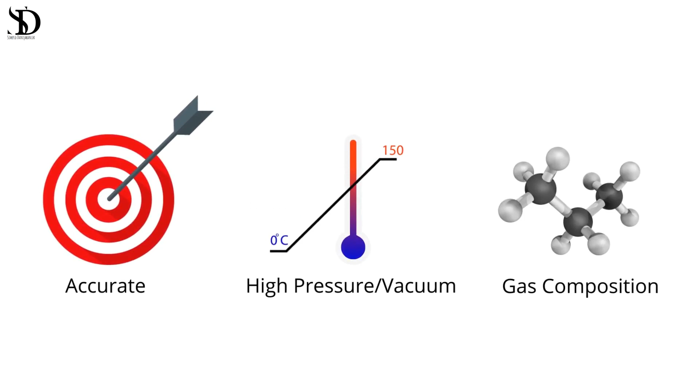Understanding electronic pressure measurement. Principle of operation. Electronic pressure measurement typically relies on the principle of converting pressure into an electrical signal. Various sensor technologies are employed for this purpose, including strain gauge, piezoelectric, capacitive, and resonant sensors. These sensors detect the pressure-induced mechanical deformations and translate them into electrical signals.

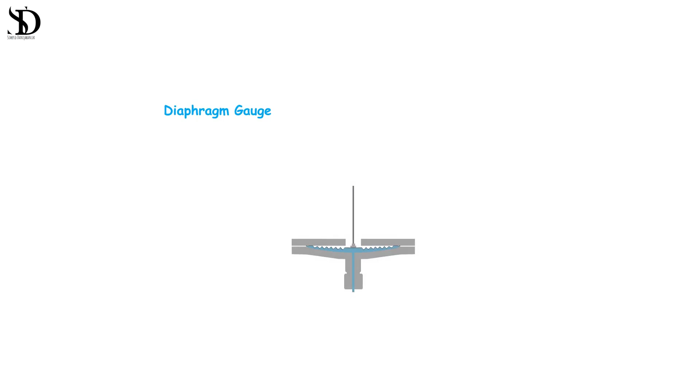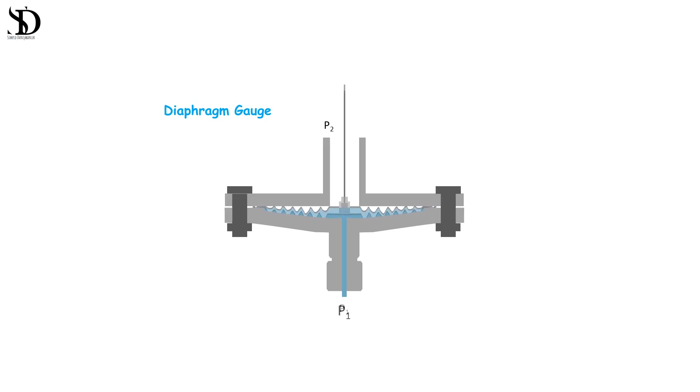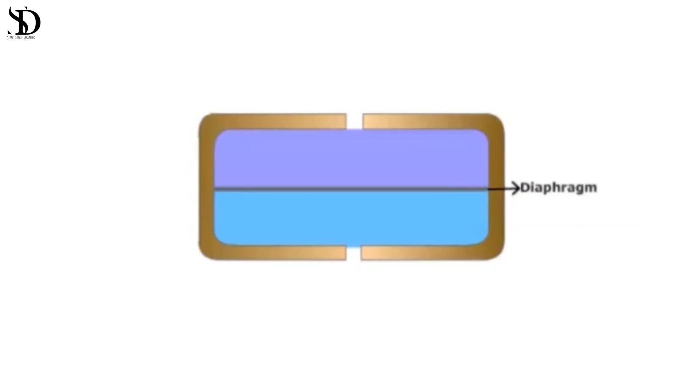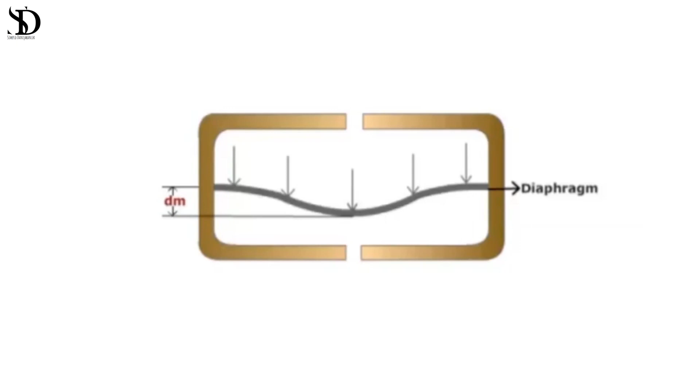Before examining the types of pressure sensors, it is useful to mention diaphragm pressure gauges and the corrugated diaphragms used in them. Diaphragm pressure gauges. Diaphragm pressure gauges are instruments used for measuring pressure in various industrial applications. These gauges rely on the deformation of a flexible diaphragm to measure the pressure exerted on it. The diaphragm, typically made of materials like stainless steel or elastomers, responds to pressure changes by flexing or moving. This movement is then translated into a mechanical reading displayed on the gauge.

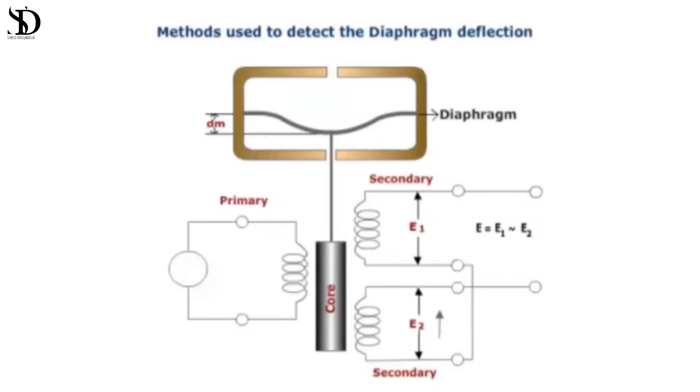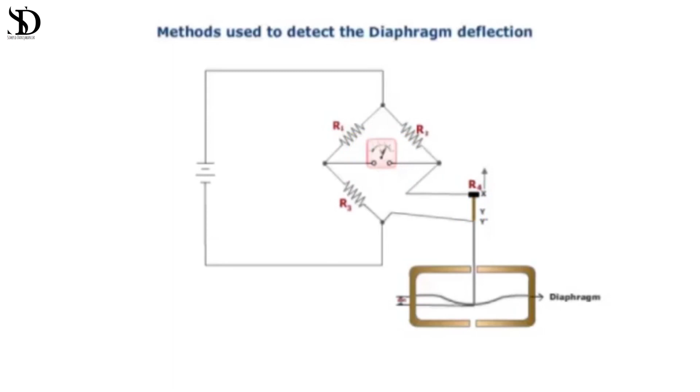Working principle. The fundamental principle behind diaphragm pressure gauges involves the application of pressure to one side of the diaphragm. As pressure increases or decreases, the diaphragm flexes, causing a change in its shape. This deformation is then linked to a mechanical system within the gauge, often a set of levers or springs, which translates the diaphragm's movement into a pressure reading. It is this deformation or deviation that electronic sensors use to read the pressure.

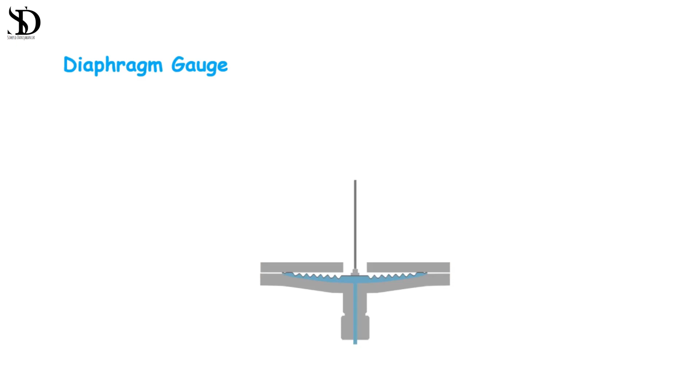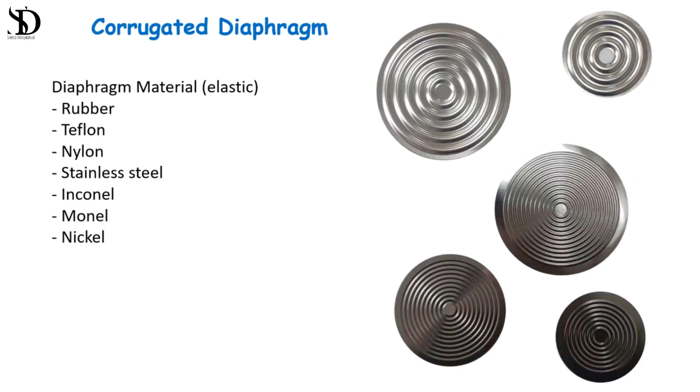Corrugated diaphragms. Corrugated diaphragms refer to flexible membranes used in diverse engineering applications. These diaphragms are characterized by their corrugated or pleated structure, allowing for greater flexibility and sensitivity to pressure changes. Features. Flexibility. The corrugated design enables more extensive deformation, making them ideal for applications requiring sensitive pressure measurements. Resistance. Corrugated diaphragms are often constructed from materials like rubber, metal alloys, or composite materials, offering resistance to corrosion, temperature variations, and chemical exposure. Uniform stress distribution. The corrugated pattern helps distribute stress more evenly across the diaphragm, enhancing its durability.

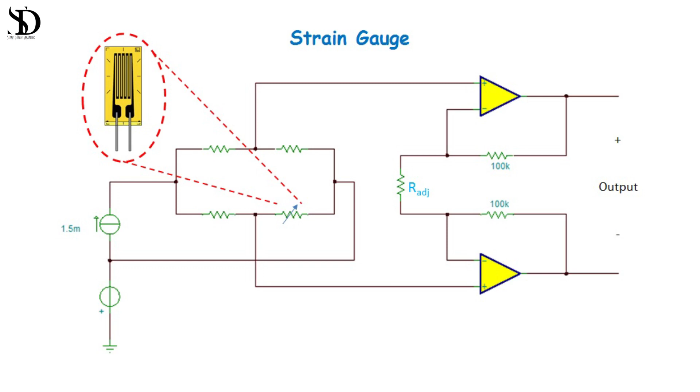Types of electronic pressure sensors. Strain gauge sensors. These sensors use the resistance changes in a wire or foil subjected to strain due to pressure, converting it into an electrical signal. They're widely used in load cells and pressure transducers, offering excellent sensitivity and accuracy. These sensors excel in applications requiring precise pressure measurements, such as aerospace, automotive, and material testing.

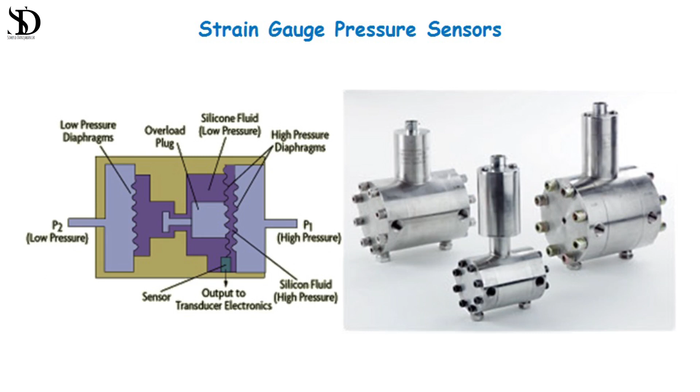Piezoelectric sensors. They generate electrical charges when subjected to mechanical stress, allowing the measurement of pressure. Their rapid response time and ability to measure dynamic pressure changes make them suitable for impact measurements, vibration analysis, and shockwave monitoring in industries like defense, automotive crash testing, and biomedical research.

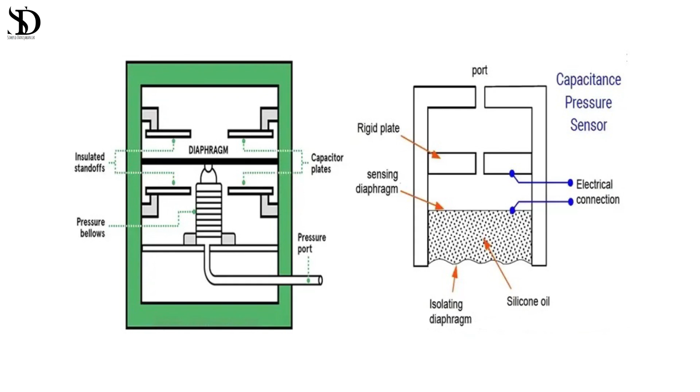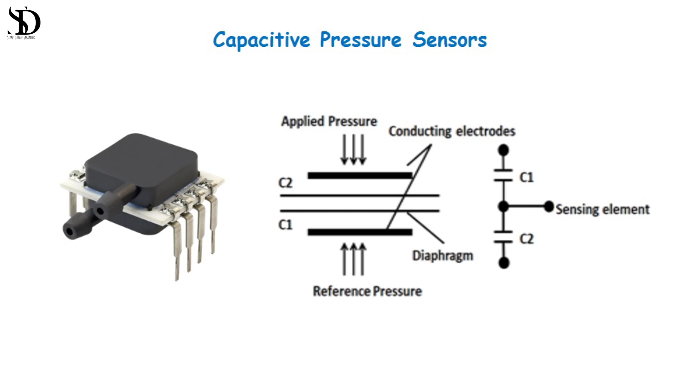Capacitive sensors. These measure pressure by detecting changes in capacitance resulting from the deflection of a diaphragm under pressure. Capacitive sensors are ideal for applications requiring high accuracy and stability, like barometric pressure measurement in weather stations, altitude sensing in aircraft, and industrial process control. As an alternative to capacitive sensors, the displacement of a diaphragm can be measured magnetically by means of changes in inductance, reluctance, LVDT, Hall effect, or by eddy current principle.

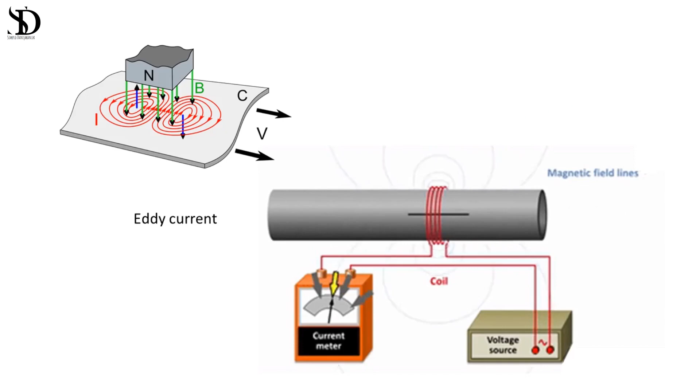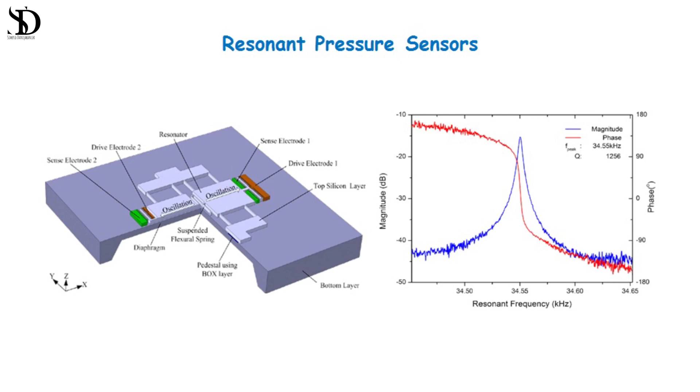Resonant sensors. Detect pressure-induced changes in resonant frequency, providing accurate and stable pressure measurements. They find utility in high-precision applications such as gas chromatography, where precise pressure control is essential for accurate analysis.

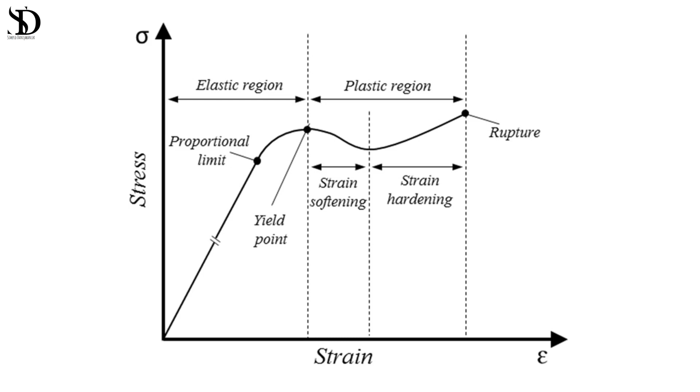Fiber optic sensors. Fiber optic pressure sensors are a subset of optical sensors designed to measure pressure variations utilizing the principles of optical interference or changes in the properties of optical fiber under pressure. These sensors are used in various industries, including aerospace, automotive, medical, and industrial applications, due to their high sensitivity, immunity to electromagnetic interference, and ability to operate in harsh environments.

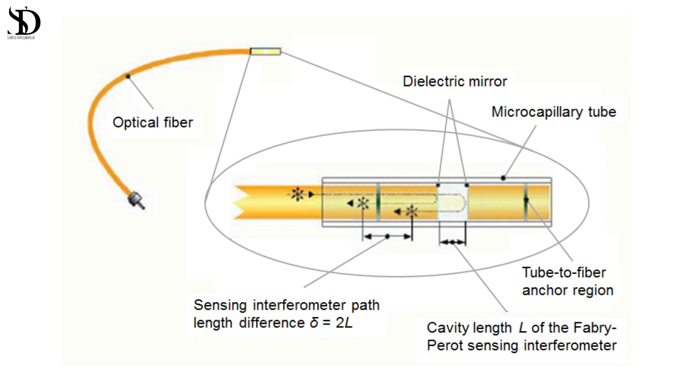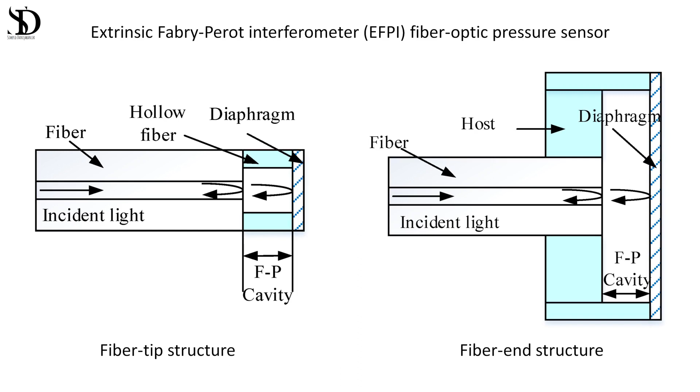Fabry-Perot sensing interferometer. The Fabry-Perot interferometer is a fundamental design employed in fiber optic pressure sensors. It consists of two parallel reflective surfaces separated by a cavity, typically an air gap or a diaphragm. When pressure is exerted on the diaphragm, causing deformation, the distance between the reflective surfaces changes, altering the interference pattern of light traveling through the cavity. This change in interference pattern is then correlated to the applied pressure. The Fabry-Perot sensor's key advantage lies in its high sensitivity to minute pressure changes. However, its design complexity and susceptibility to temperature variations may require compensation mechanisms to ensure accurate pressure readings.

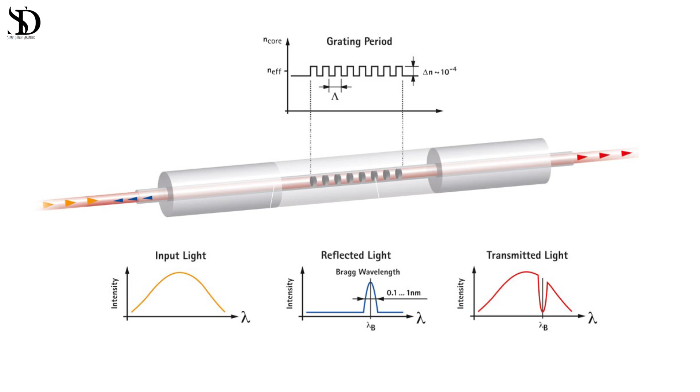Fiber Bragg grating sensors. Fiber Bragg grating, FBG, sensors are another prominent type of fiber optic pressure sensor. These sensors consist of a segment of optical fiber where periodic microscopic alterations in the refractive index are induced along its length. When pressure is applied, the grating structure experiences mechanical deformation, resulting in a change in the grating period and subsequently altering the reflected wavelengths. This alteration in wavelengths is used to measure the applied pressure. FBG sensors offer advantages such as immunity to electromagnetic interference, compact size, and high sensitivity. They find applications in structural health monitoring, oil and gas industries, and medical devices due to their ability to provide distributed sensing over large areas.

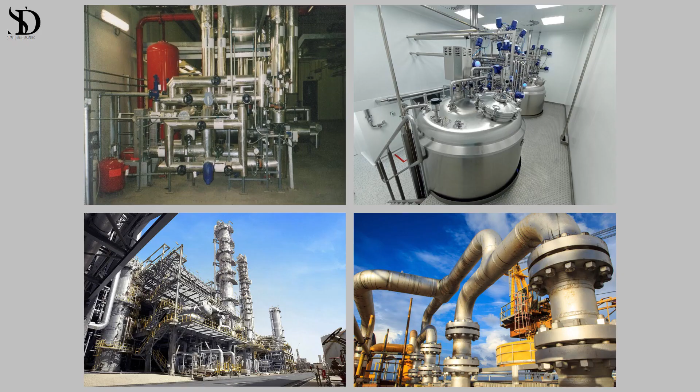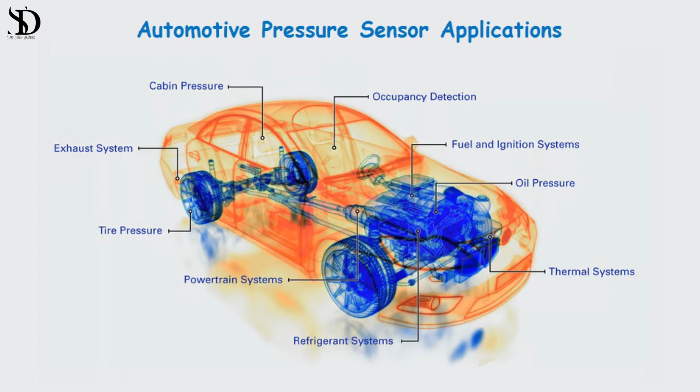Applications: 1. Industrial automation. Electronic pressure measurement is integral in monitoring and controlling processes in industries like manufacturing, oil and gas, pharmaceuticals, and more. It ensures precise operation and safety by monitoring pressure variations in pipelines, machinery, and equipment. 2. Automotive. In vehicles, electronic pressure sensors are used for measuring tire pressure, engine oil pressure, and other critical parameters for ensuring optimal performance and safety.

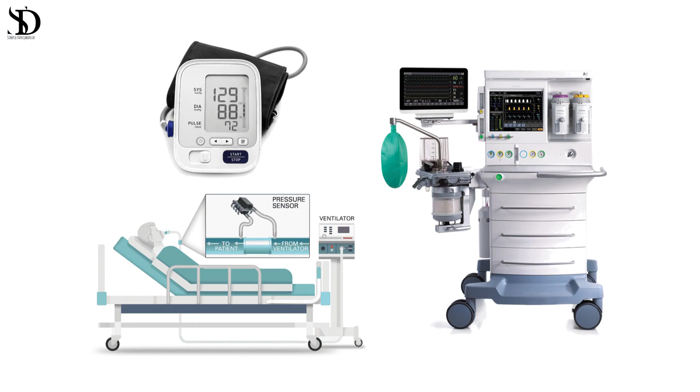3. Medical sector. In medical devices like blood pressure monitors, ventilators, and anesthesia machines, accurate pressure measurement is crucial for patient care. 4. Environmental monitoring. Used in weather forecasting, water management systems, and air quality monitoring to gather data for analysis and decision-making.

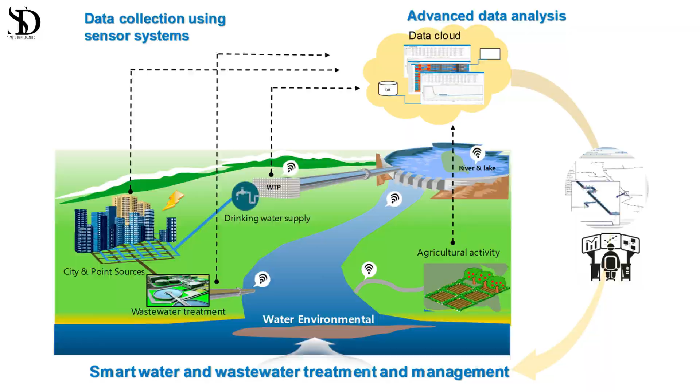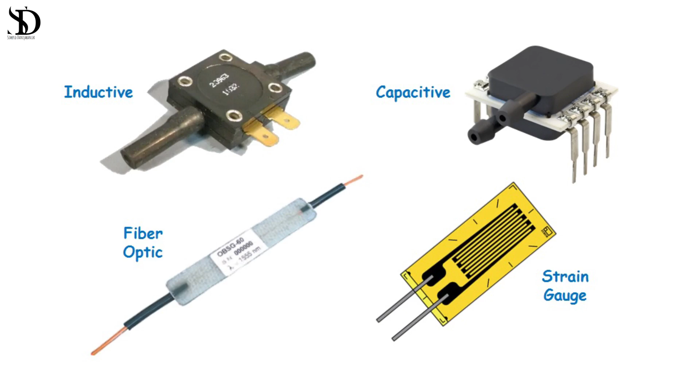Concluding, electronic pressure measurement, supported by diverse sensor technologies, underpins critical aspects of our modern world. Each sensor type, strain gauge, piezoelectric, capacitive, resonant, and fiber optic, offers unique advantages, enabling precise and reliable pressure measurements across industries ranging from aerospace to healthcare.